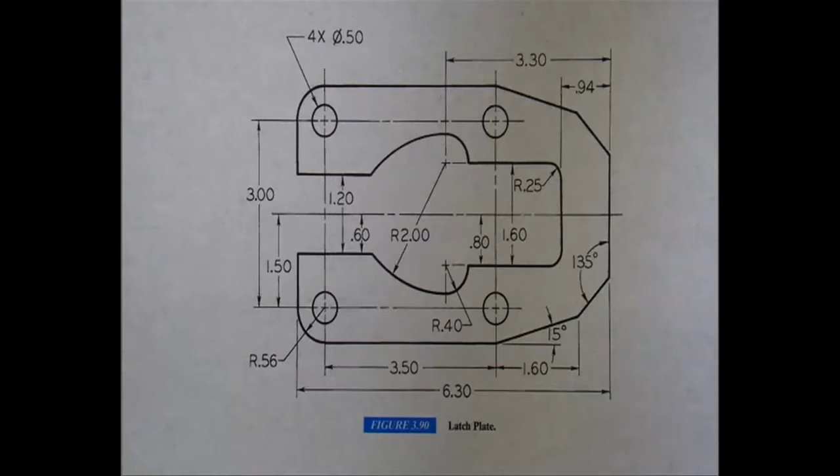This video will demonstrate how to draw or lay out the latch plate. This figure can be found on Blackboard. This is the layout of the latch plate. So what I'm going to do today is help show you how to lay this out and draw the shapes using your different tools and equipment.

Up to this point you've been using your scale. You've also been using some of your other tools, and we're going to use the circle template today, of course along with the lead holder. We'll probably even have to pull out our compass for some of the other arcs. You can look at this from the Blackboard screen, or you can print it out if you need to, whatever the case.

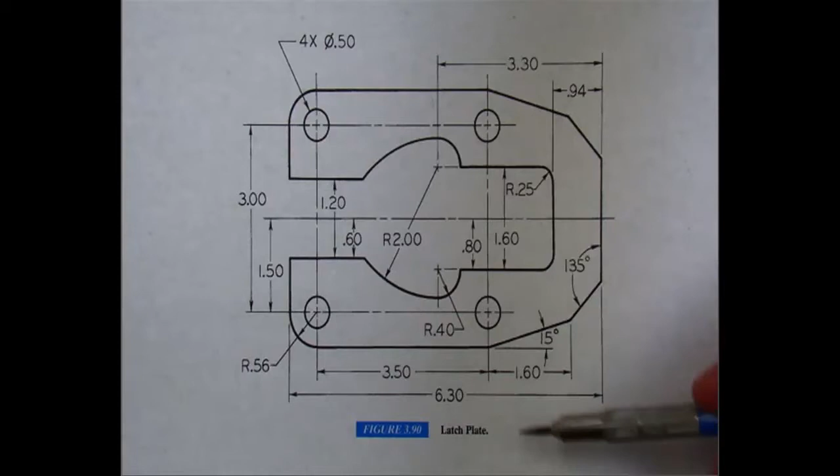So first let's kind of break this down into geometric shapes. You see some circles and arcs. The overall shape is a large rectangle. We've got some angled lines. And so I would encourage you that every drawing that you're going to lay out, you would just look at the different geometric shapes so you can figure out where to start.

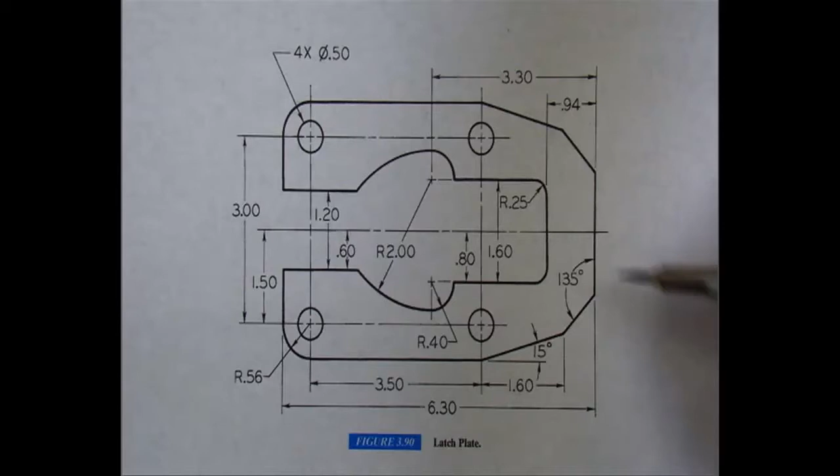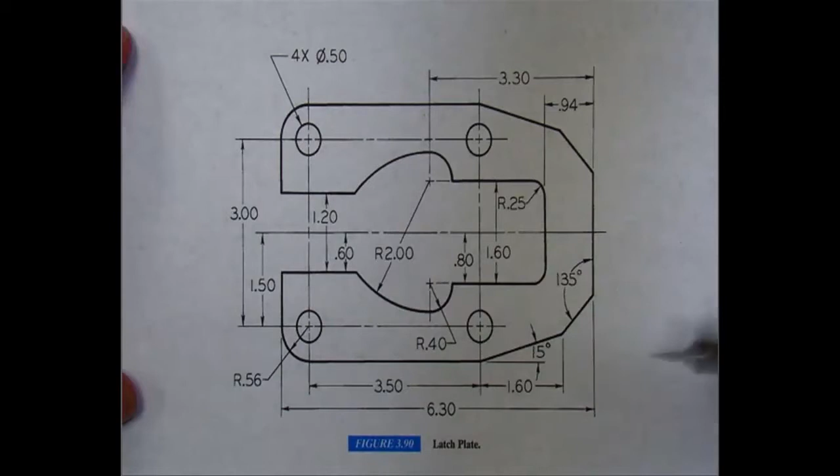Here you have a center line that goes right down the middle, and you've got these other center lines that locate the center points of the arcs and circles. You may notice that the center line right down the middle is dividing this object in half. So this is a symmetrical object about that center line. So that may be a good place to start.

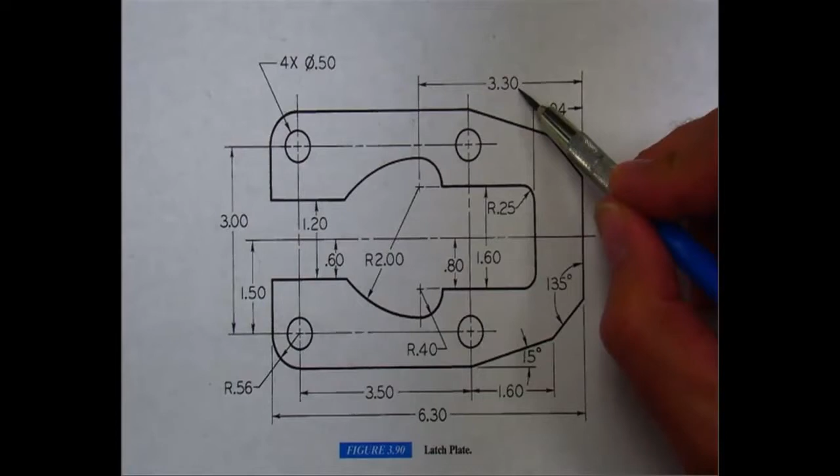Now, one thing you may notice is that the units are in inches, 2 decimal places. Down here you've got this radius of 0.56. So if you'll remember, that means that every point along this arc to the center point has a distance of 0.56. This radius of 0.25 in the corners. And then you have a radius of 0.4.

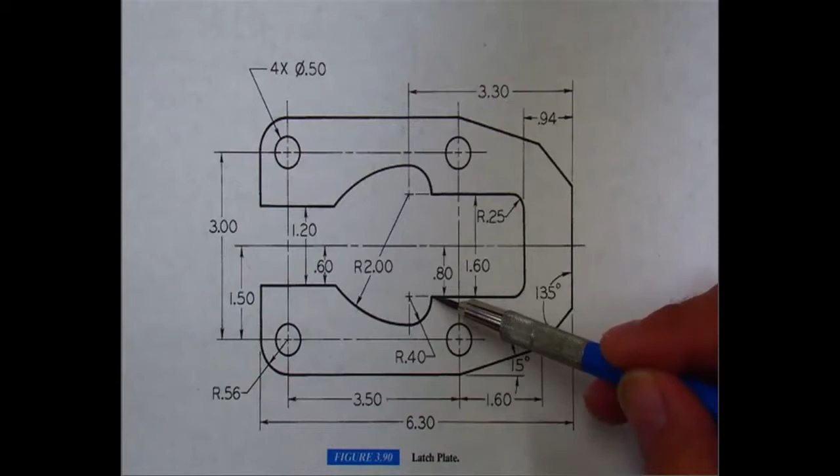This center line right here will help you know where to start the arc. So you'll need to locate that. And then as you come around, the other center line will help you know where to end the arc. So it's very important to locate these center points for your arcs and circles. These also have tangent points with line segments attached.

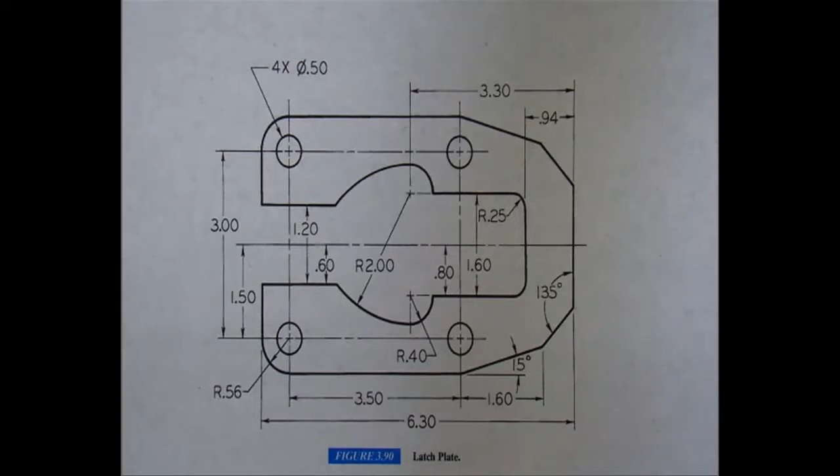And so you may want to lay out the entire rectangle first. It's totally up to you. But to get started, we need to go ahead and tape down a piece of drawing media to our table. Now, in previous videos, you learned how to lay out an A-size border with a title strip.

To save time, I went ahead and pre-printed from the computer a border and title strip so you can see it. But please remember that you don't darken the border and title strip until you completely finish laying out your design. So don't darken it first. Wait till the very end. You don't want to smudge it or anything. So the latch plate will go inside of this area known as the working space.

So let me go ahead and grab some drafting dots and tape it down to the table. If you'll remember that procedure, grab your T-square or your parallel bar and line up either the edge of the paper, or if you already have some pre-printed line segments on the paper, you can line it up with that. You want the drawing on the sheet and the border lines to be lined up with one another.

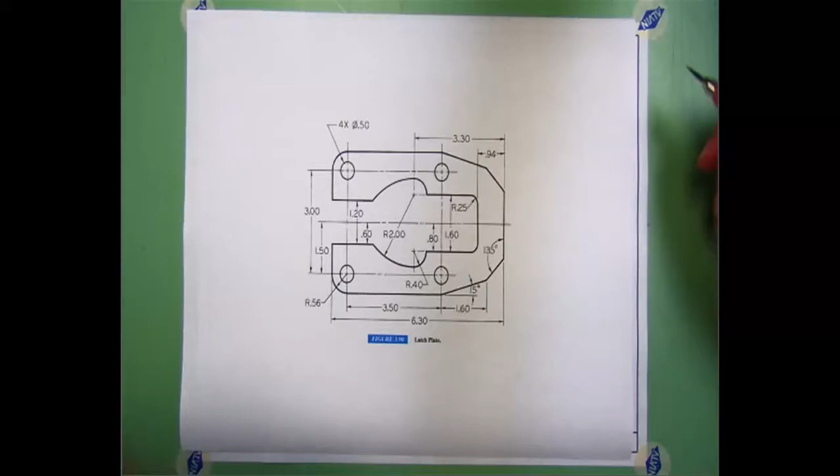Now let's look back at the latch plate and try to figure out where we're going to start laying this out. We've got all of these dimensions on here. They're going to help us size this part and help us in our layout of this latch plate. You could lay out the entire rectangle. The thing we want to make sure of is that it's centered inside of the space on the sheet.

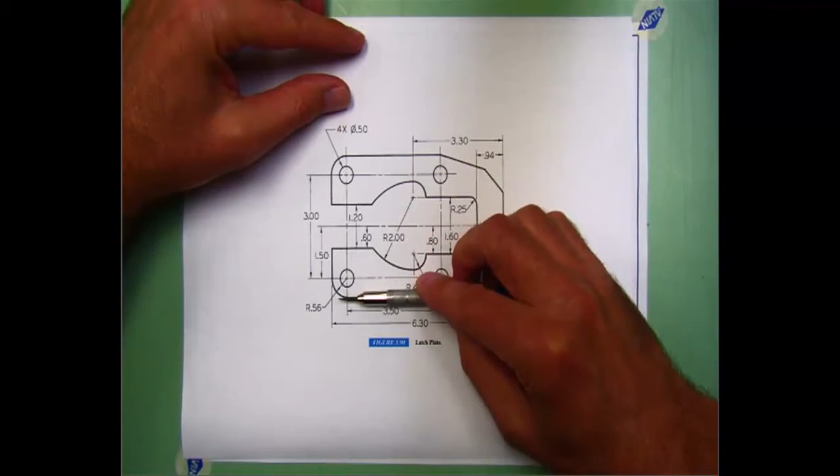You could establish the center line first and then take measurements from there. It's really totally up to you. See, this goes down 0.6 and then 1.5 and then another distance. And so before you get in too much of a hurry, go ahead and break down and analyze where you want to start.

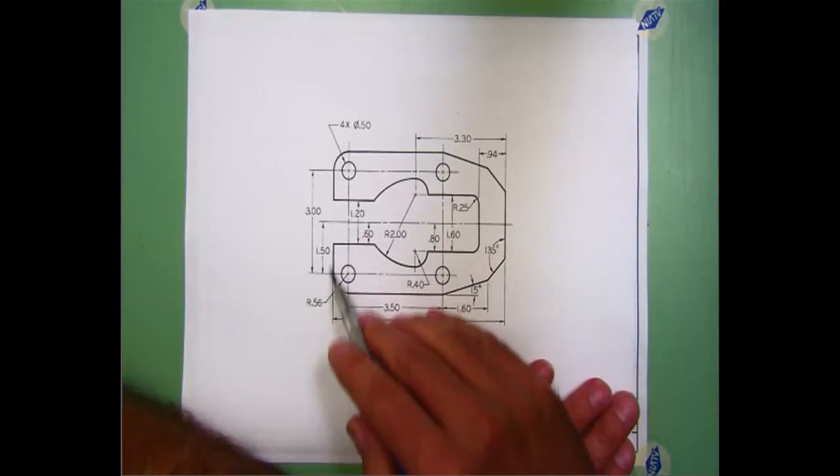You've got horizontal line segments, vertical line segments, and they all relate to one another. You say, well, how long are these line segments? Well, it really doesn't matter. What matters is that you take the dimensions that are given and you draw everything that you need to based on these dimensions, and then everything else will take care of itself and the design will come together.

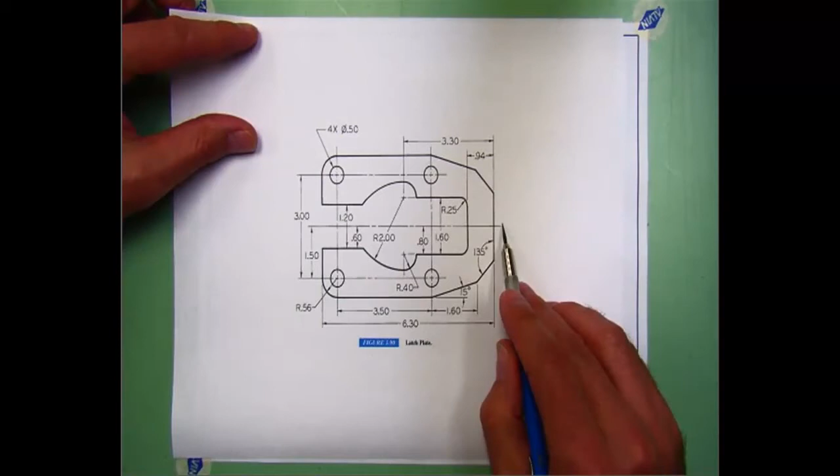So first, let's establish this horizontal center line. Now, as you look back at your layout, this is the working space. From the top of the title strip to the top of the border line, and then in between the two border lines from left to right, this is your working space, and this is where your design goes.

And so when you take this measurement right here, that's where you want to find the midpoint or the center of that space. So I'm going to take my scale and I'm going to measure and see how tall this working space is. Now as I look, it looks like it's about 7 5/8 of an inch. 7 5/8. So what we need to do is take that 7 5/8 and divide that in half.

Now you can take your calculator and plug in 7 5/8 and then divide that by 2 and get your answer. Not a problem. But let me go ahead and show you another way that you can divide numbers in half. You remember, this is called an improper fraction, I think. You all have had math a lot more than I have recently, but here's some techniques that we can use in drafting. So let's start with something a little more simple.

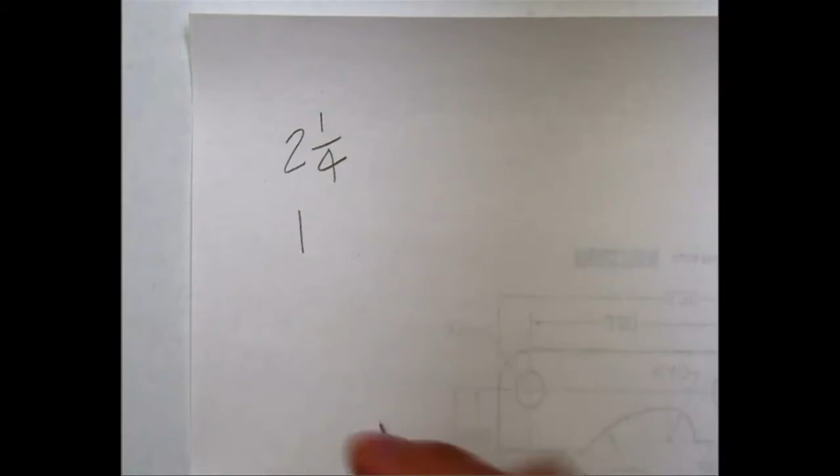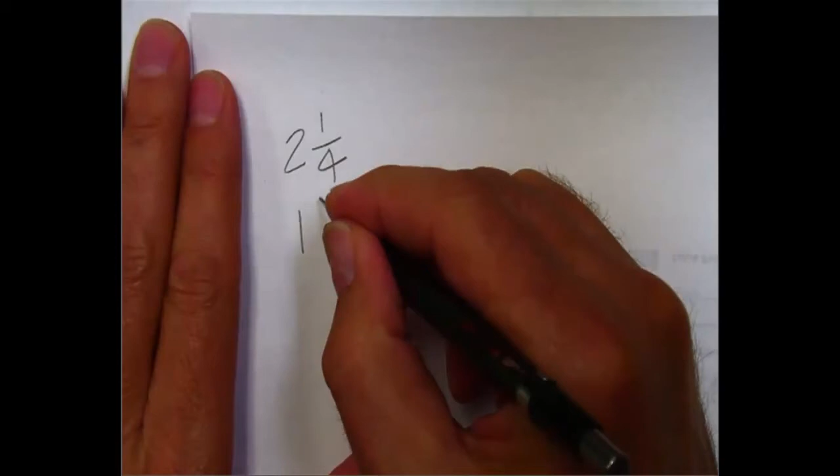Let's start with 2 1/4. 2 1/4, and we need half of this number. So what I like to do is isolate the whole number and then ask a question. What's half of 2? Well, it's easy. The answer is 1. So we'll write down 1. And then I like to isolate the fraction. And we say, what's half of a 4th? And you go, well, that's easy. Half of 1/4 is 1/8. So let's write down 1/8. So half of 2 1/4 is 1 1/8.

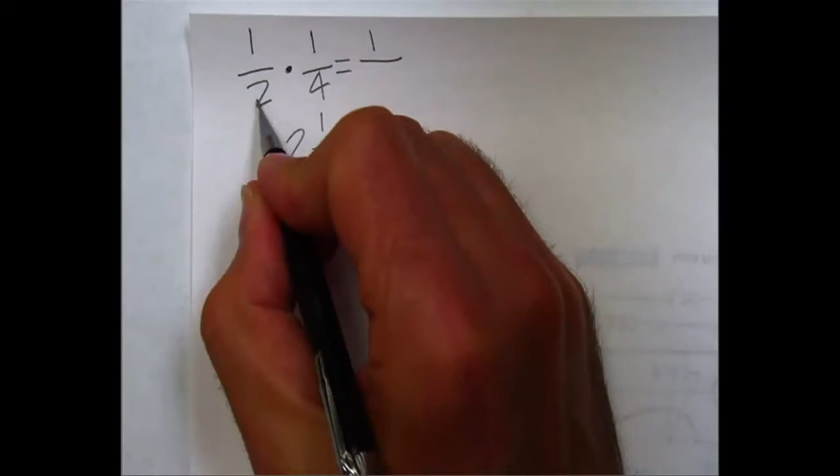But what are we really saying? So let's write this out so we can see it. We're saying what's half of, and remember, of in math means multiplication, so we'll write a dot. What's half of 1/4? If you remember the equation, we'll take 1 times 1 is 1. Then we'll go 2 times 4 is 8. And that's what we're doing when we do that in our head. What's half of 1/4? And we know that equals 1/8. Just to review. Let's do another one.

What's half of 1/8? Well, you do your multiplication. 1 times 1 is 1. 2 times 8 is 16. And so 1/2 of 1/8 equals 1/16. Notice the numerator stays the same, and then the denominator is doubled whenever you're taking 1/2 of a fraction. So 1/2, see the pattern over here, 1/2 of 1/8 is 1/16. And so keep that in mind as you do your math in this class.

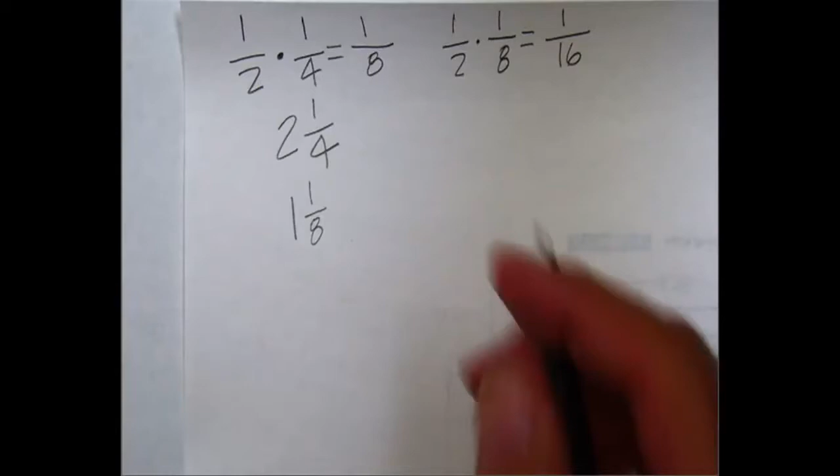Let's do another one that's a little bit different. 3/8 of an inch. So we're going to say what's half of 3/8? And we do our multiplication. So 3 times 1 is 3. 8 times 2 is 16. So 1/2 of 3/8 is 3/16. The numerator stays the same. The denominator is doubled. How about what's half of 3/16? 3 times 1 is 3. 16 times 2 is 32. So 1/2 of 3/16 is 3/32 of an inch. This is a quick way to take half of fractions.

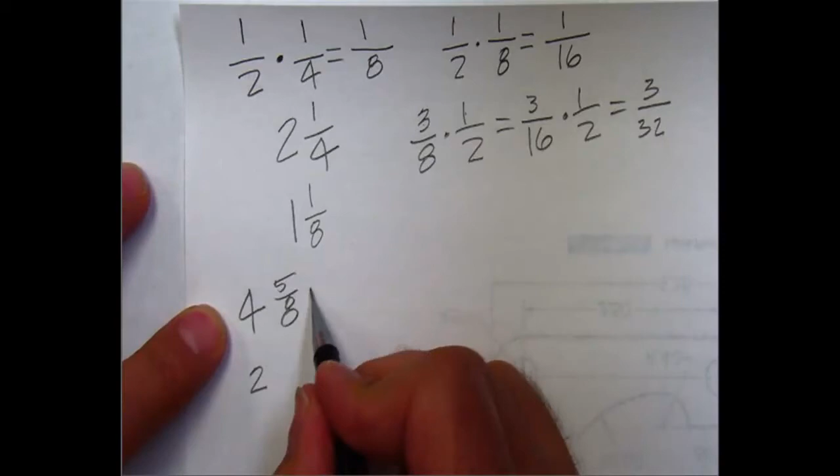And if you have mixed numbers, then this is a really quick way to get half of a measurement that you need. Let's do another one here. What's half of 4 5/8? So we know that 1/2 of 4 is 2. And then half of 5/8, what's that going to be? Remember the pattern. 5 times 1 is 5. 8 times 2 is 16. So half of 4 5/8 is 2 5/16. So just remember that. Take notes on this, and it'll help you a lot.

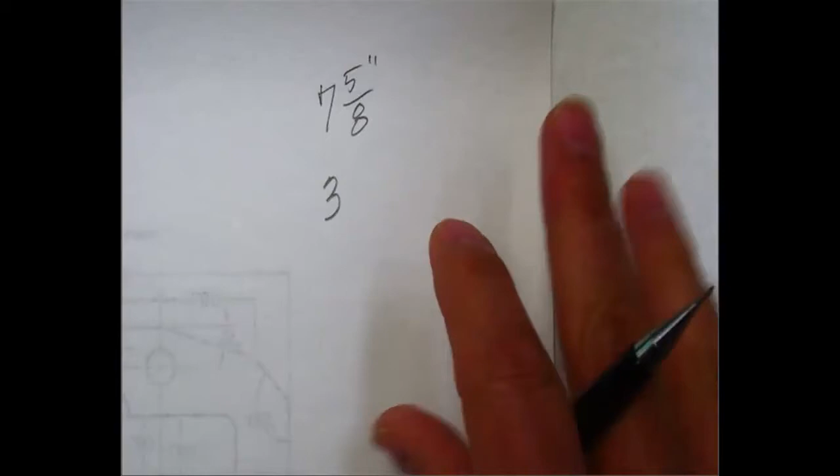So let's go back to this one, 7 5/8. Now when the whole number is odd, and so we've got 7 5/8 here, we do something a little bit different. We still isolate that number, and we know that half of 7 is 3 1/2. So what you do is you write down the whole number, 3, and you just take that half and set it aside. Just leave it alone for a minute. And then you say, well, what's half of 5/8? Now this only works, remember, when the whole number is odd, you can use this method.

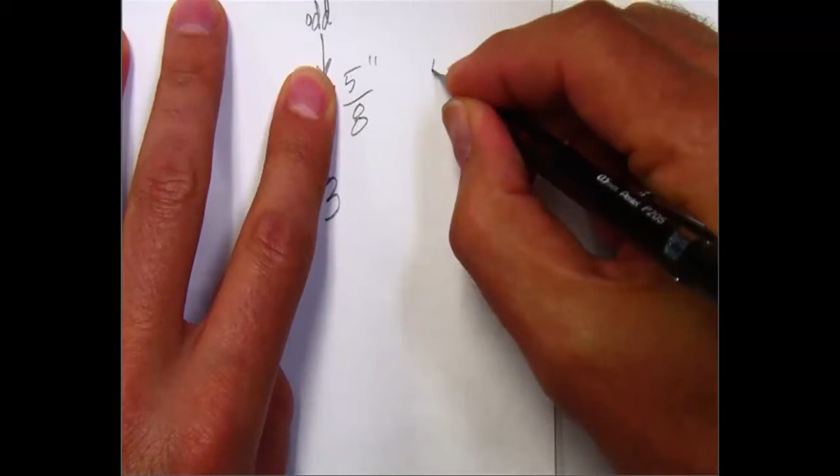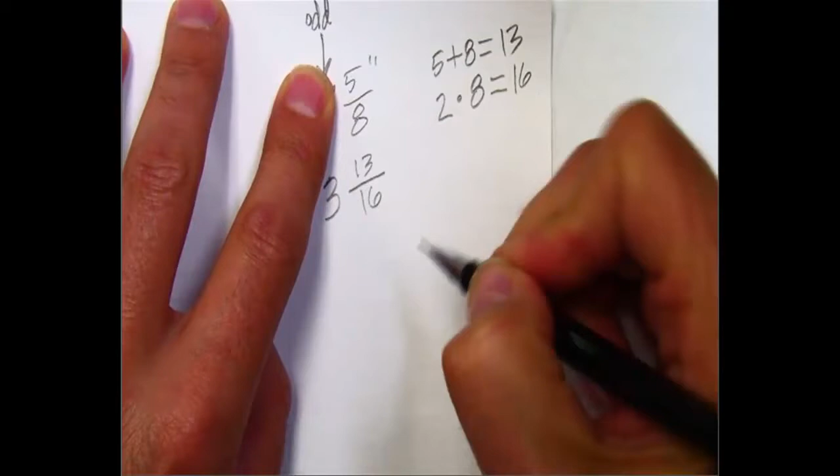Half of 7 is 3 1/2. Now you take the numerator plus the denominator, and you get, correct, 13. So you write down 13. That's your numerator. Then what you do is you double the denominator. And 2 times 8 equals 16. So we write down our 16 for the denominator. So half of 7 5/8 is 3 13/16.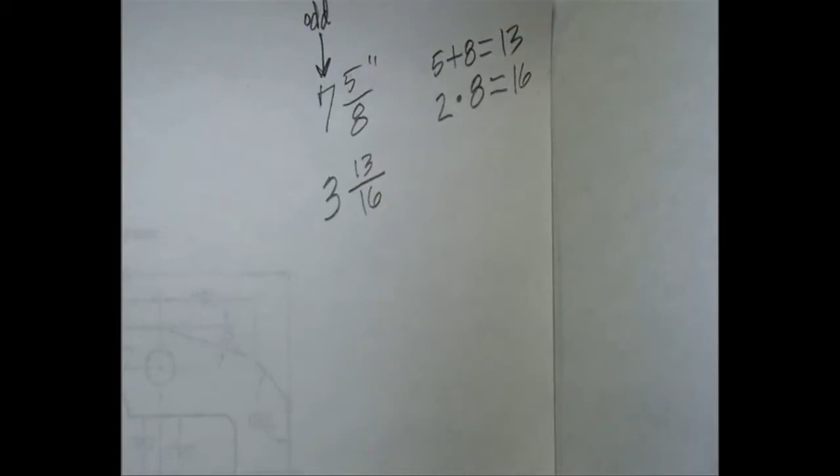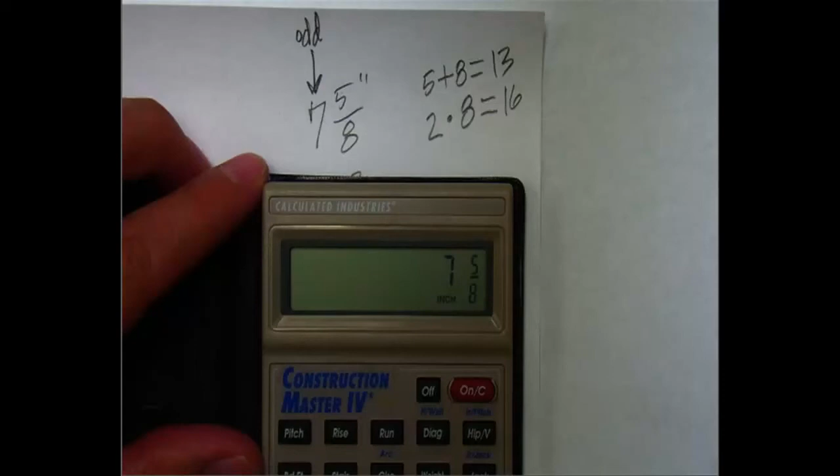So let's double check it. Let me grab a calculator and let's plug in this equation and make sure we did it correctly. 7 5/8 of an inch divided by 2 equals 3 13/16. Just what we got. Now a math teacher showed me this trick a few years ago, and it's really helped out in drafting.

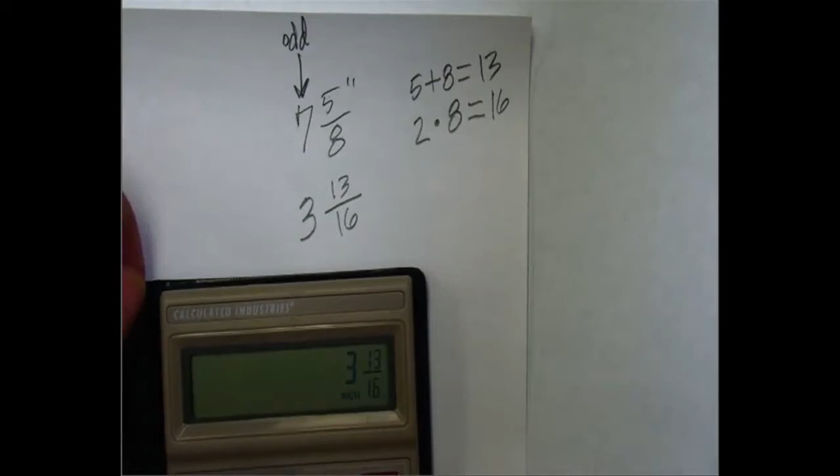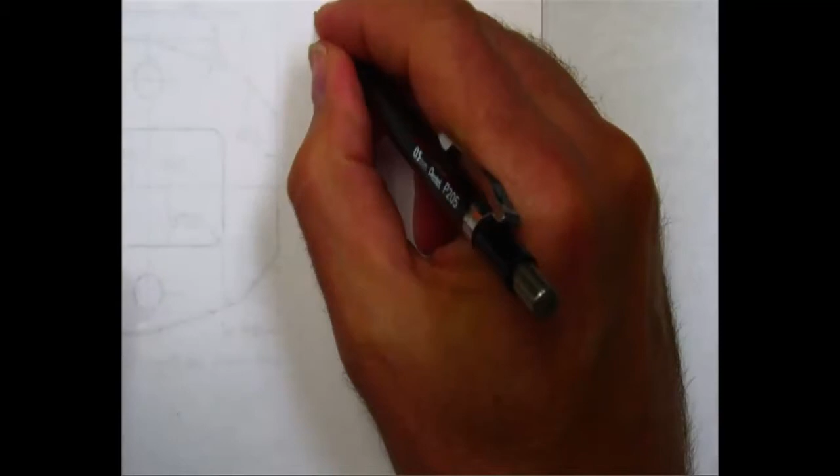And write this down and use it any chance you get, because it'll save you a lot of time. There's no problem using the calculator, but man, if you can do this method, it'll really save you some time. Let's practice another one. Let's do what's half of 3 7/8. Half of 3 7/8.

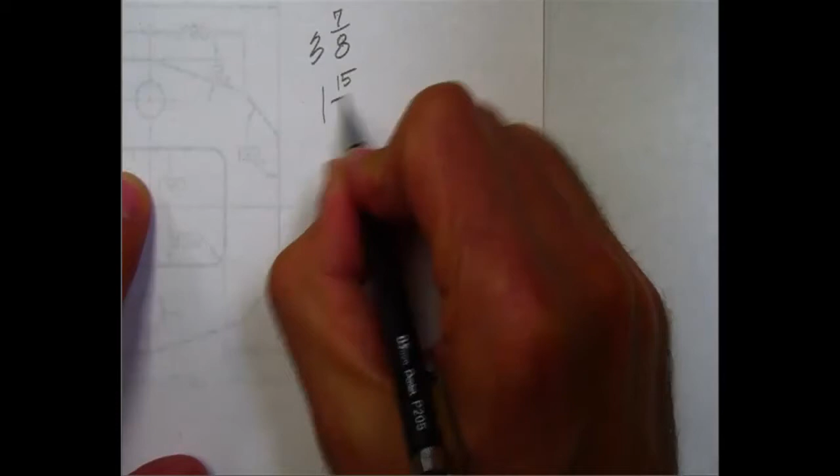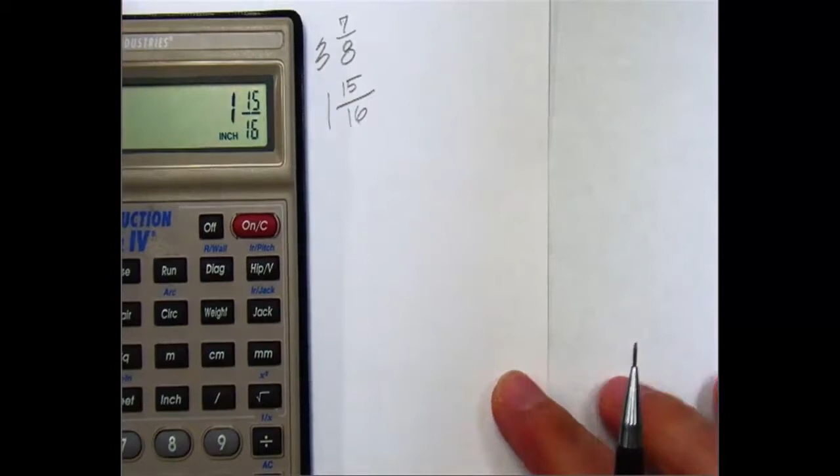So the first thing we do is we isolate the whole number. What's half of 3? 1 1/2. So we write down 1 and set the half part. Then we go 7 plus 8 is 15. Double the denominator and you get 16. So half of 3 7/8 is 1 15/16. Let's double check it on the calculator. Three 7/8 divided by 2 is 1 15/16. Just like we did on paper.

Had one math teacher that called this mental gymnastics, and that was doing these equations in your head. So I hope that gives you some new tools. Remember, this method that we just did only works when the whole number is odd. When it's even, we just do it the other way. Okay?

Now, let's go back to our layout and remember the measurement from the top border line to the top of the title strip of our working space is 7 5/8 of an inch. Half of that was, what was that, 3, remember what it was? 3 13/16. So I'm going to count down and measure 3 13/16, counting by sixteenths.

Remember, you could also take a little bit of a shortcut. Instead of counting all the way up to 13, you could say 4 is 16/16, and so you could say, well, this is 3 16/16, 15, 14, 13, and you can get there a little bit quicker. But you'll develop some skills like that as you go along. So now I've established where half of 7 5/8 is, and now I'm ready to draw a horizontal line that will divide the working space in half.

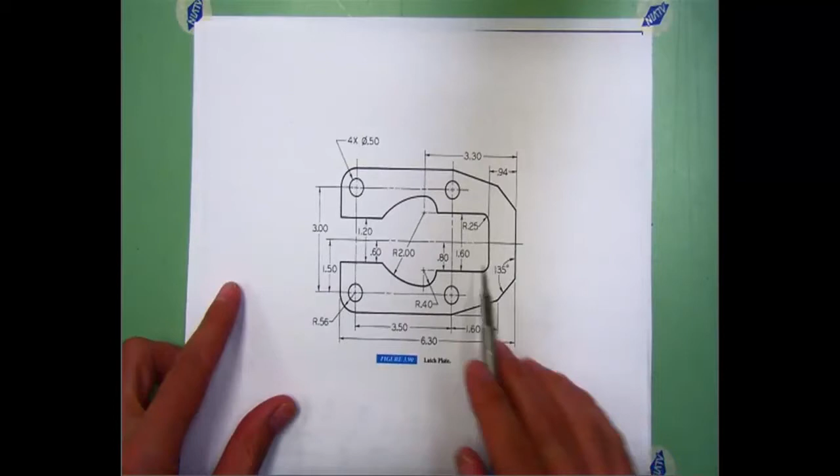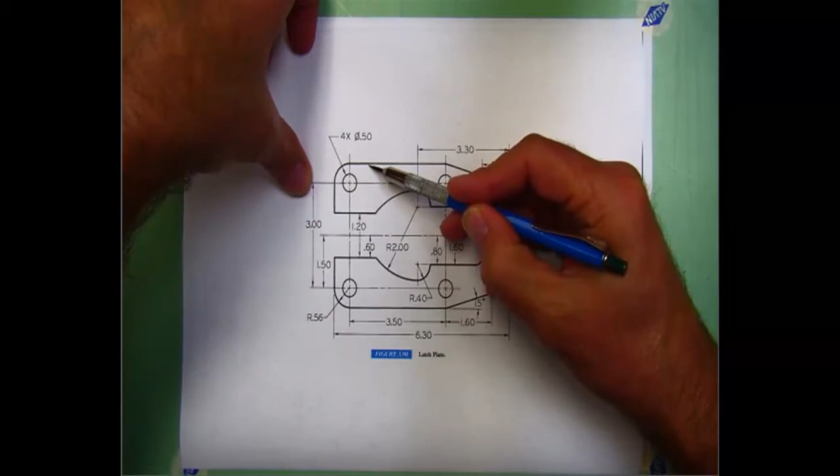So this half, 3 13/16. This other half, 3 13/16. This establishes the horizontal center line of our latch plate as well. Again, you can draw the entire rectangle if you want to, or you can start measuring from this center line based on the dimensions they give you, and you can measure upwards and downwards. However you want to do it is up to you. I'm just trying to help you see some different ways to do it.

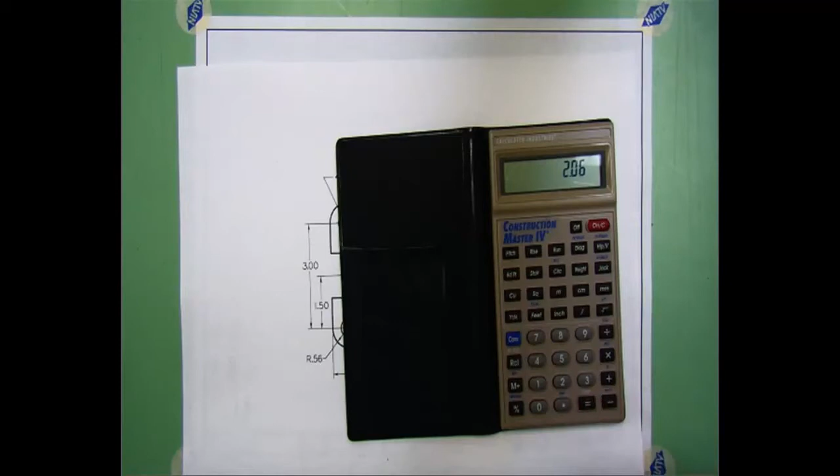And so I know that from the center line down to the other center line is 1 1/2 inches. So we could establish that center line if we wanted to, from the middle center line down to this center line. But then if we wanted to get to the outside edge, we need another dimension, and that dimension is the radius of 0.56. So if we grab our calculator and we take 1.50 plus 0.56, we get the number 2.06. So 2.06 is the dimension from the horizontal center line to the outer edge down here and up here. It's 2.06.

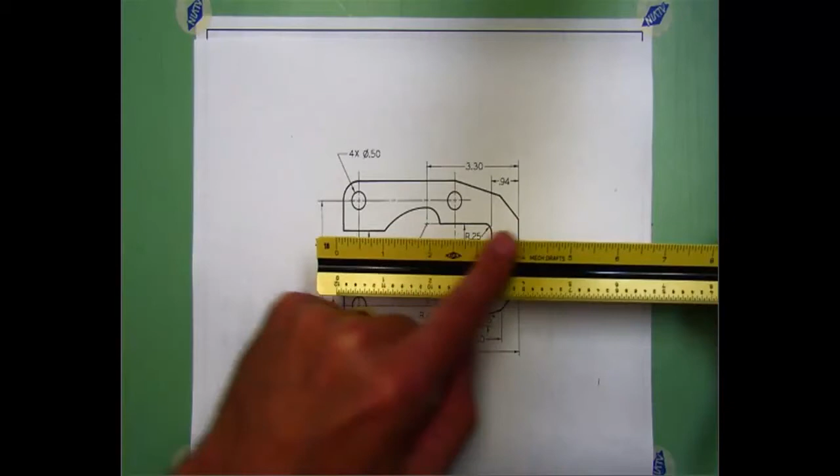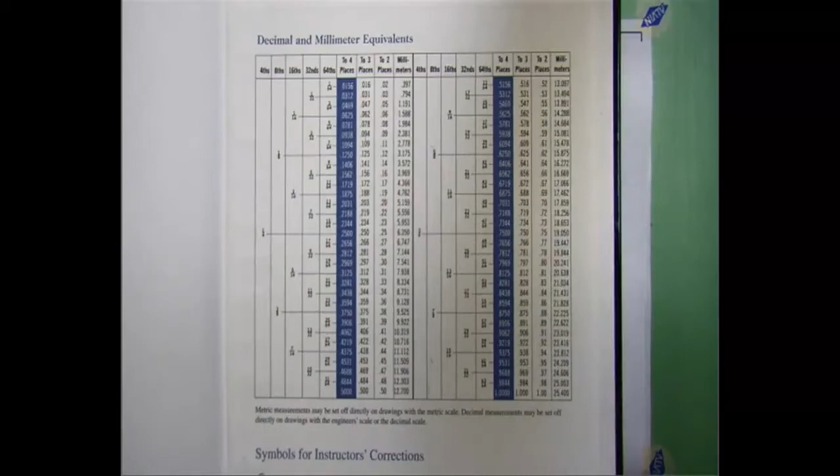So you might say, well, Mr. Turner, how do I measure 2.06 on my scale? Well, let me grab a book here. You can do this a couple of different ways. You could grab a textbook and you could look at this decimal and millimeter equivalence chart. And we have a decimal of an inch of 0.06. So let me zoom in.

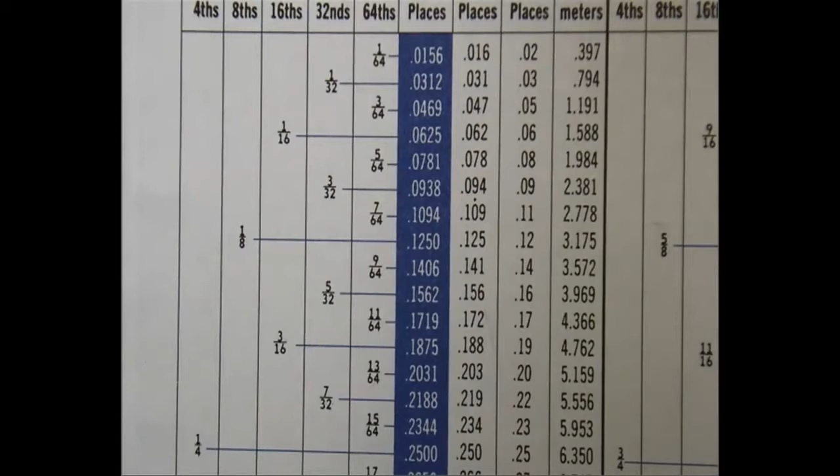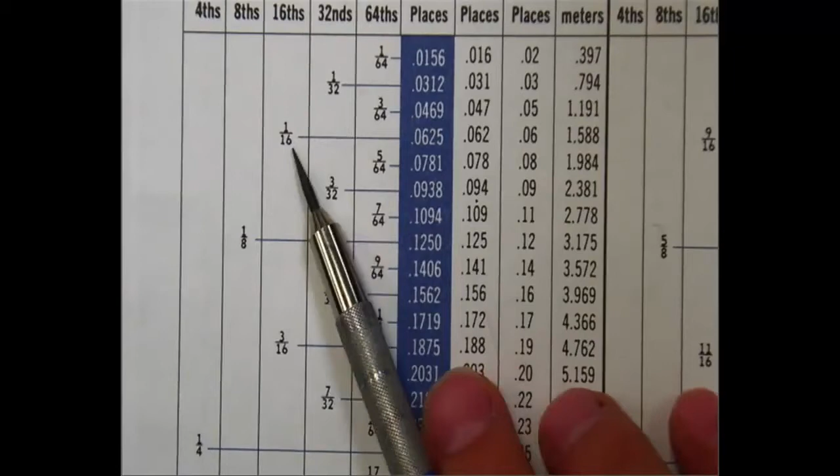Now let's see if we can find 0.06 on this chart and find a fraction that we can measure on our scale. Here's 0.06. If we follow over, it says it's 1/16 of an inch. And that will be fine. That'll be close enough. That's what it rounds to, is 0.06. 1/16 is 0.0625. It's also 0.062, and it's also 0.06. So that would be just fine. We want to be within a pencil lead width accuracy on our manual drawings.

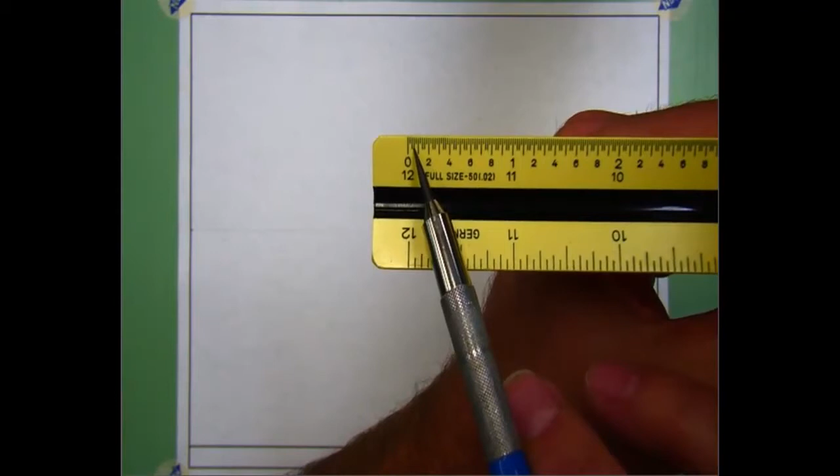Now there's another part of your scale that we had mentioned before. Let's take another look. Remember, 1 inch on this part of the scale is divided into 50 parts. So each line in each division is 0.02 inches. And so we can go 0.02, 0.04, 0.06 on this scale. So the first line, 0.02, 4, and 6. And that's 0.06 inches if you wanted to use this side of the scale. So 1/16 of an inch in fraction, which is 0.06, or you could use that smaller scale.

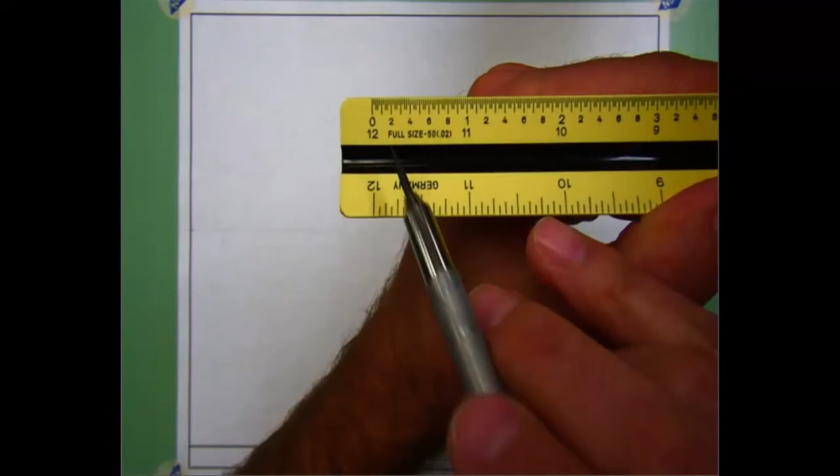Let's look at 0.94 on the scale. How would we measure that? So first we'd take this part of the scale, and we'd go 1, 2, 3, 4, 5, 6, 7, 8, 9. So that's 0.9, 0.92, 0.94 would be right there. So you could use this scale for that, or you could go back to the textbook and you could look for where 0.94 was and use this side of the scale, whatever you want to do. You're the drafter and you're responsible for accuracy, so you do what you will with it, okay?

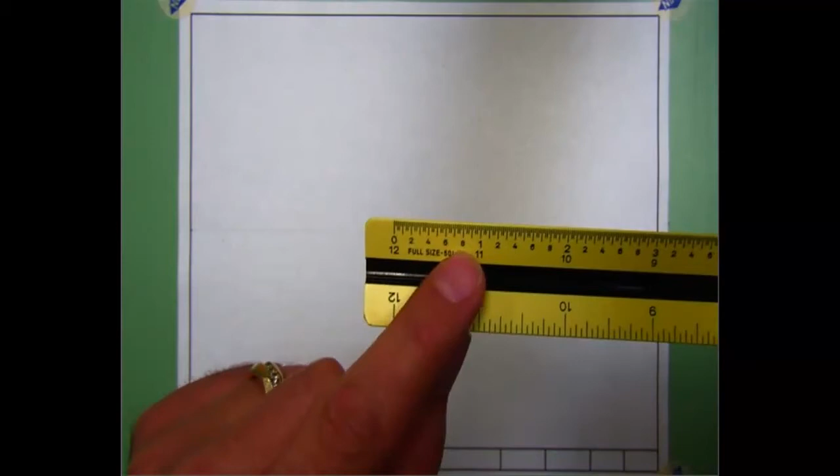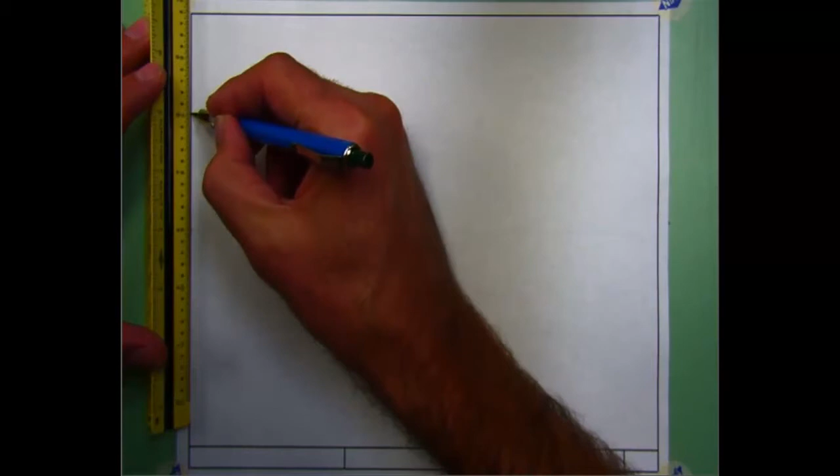So now I'm going to establish a start point on my scale where I want to measure from and line it up with my horizontal center line. And then from this horizontal center line, I'm going to measure my distance 2.06 up, make a little dot. You can make a tick mark or a dot. I prefer a dot, whatever you want to do.

And now from the horizontal center line, I'm going to measure downward 2.06. And that will locate the bottom edge of the latch plate. So let me just double check my dimensions to make sure I did it correctly. 2.06 up, 2.06 down. Now that I've established those points, I'll take my straight edge, my T-square, my parallel bar, and draw very light construction lines all the way across the paper.

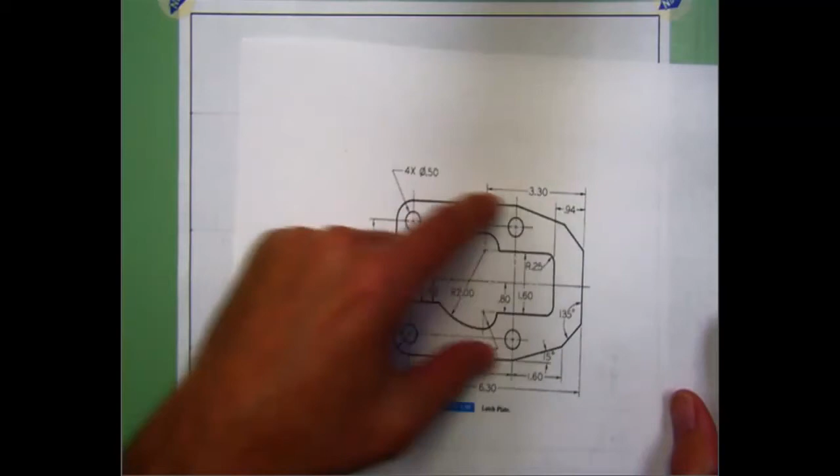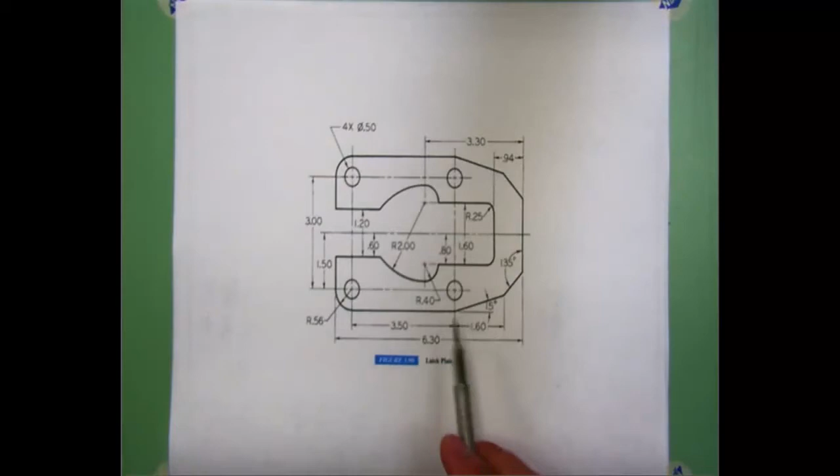So now my latch plate is centered vertically in the working space. Now I need to get these two lines here. I need to get the width of the latch plate. And the total distance is 6.30. But the problem is I don't have a vertical center line located yet. So what I need to do is to find that.

Because I want to get this right in the center of my working space. I know that 6.3 is here, but I'm not quite sure where to start. So I'll have to establish a vertical line somewhere so I can measure and get my distance. There's a couple of ways to do this. First thing I'm going to do is establish a center line. This distance and the width, remember, is 10.5. Half of 10.5 is what?

Notice I'm adjusting my scale and I'm measuring along that horizontal center line so my scale is nice and straight. So half of 10.5 is 5 1/4. I'm going to make a little dot. That'll establish a center line of my working space. And then now what I need to do is to take what's half of 6.30.

You can use your calculator, you can do it in your head, you can do it long division like right here I'm doing. 2 goes into 6 3 times. 6, 0. 2 goes into 3 1 time. 2 times 1 is 2. 1 left over. 2 goes into 10 5 times with none left over. So half of 6.3 is 3.15. Again, you probably could have done that in your head, and that's fine. You can use a calculator, no problem. Just work it out.

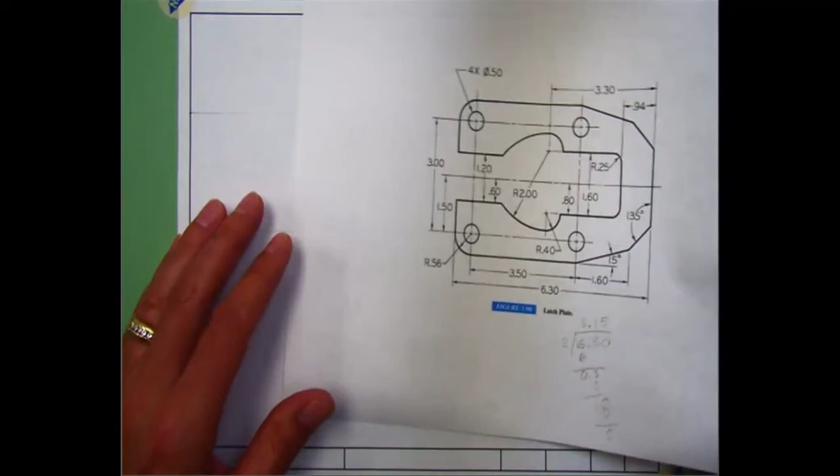So now, again, it goes back to which side of the scale do I want to use? Well, you could look it up on the table or the chart. I'm going to use this side of the scale on mine. And I'm going to line this up on 3.15, right there in the middle. Hold my scale firmly. And now from 3.15, I'm going to go to the left and mark on 0. Then I should be able to go all the way to the right on 6.3 and make a little dot as well.

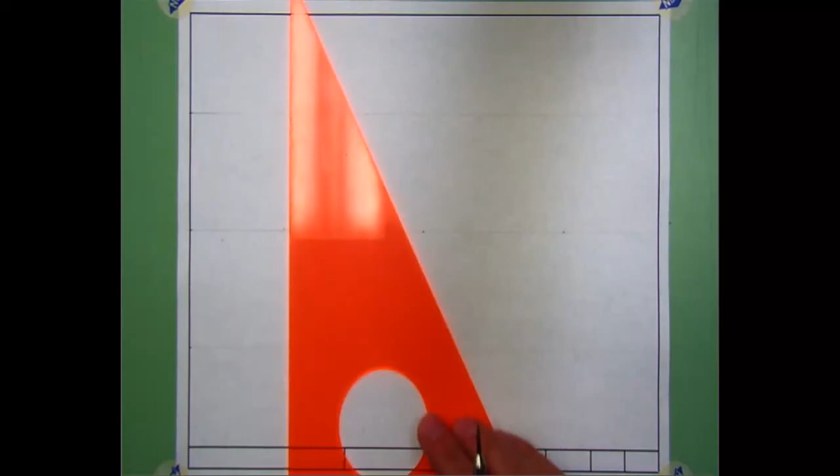And by doing that, now I've centered the 6.3, and this should be the same as this. The most important thing is that you've got the 6.3 dimension accurate. The spacing we can adjust a little bit, but we've got to have our latch plate to be 6.3. So I'm going to draw these vertical center lines. Now I've got my T-square below where you can see, but I am using it to draw and to support my triangle as I draw these line segments. So now I've established the overall outside rectangle of this latch plate, and it's centered inside the working space.

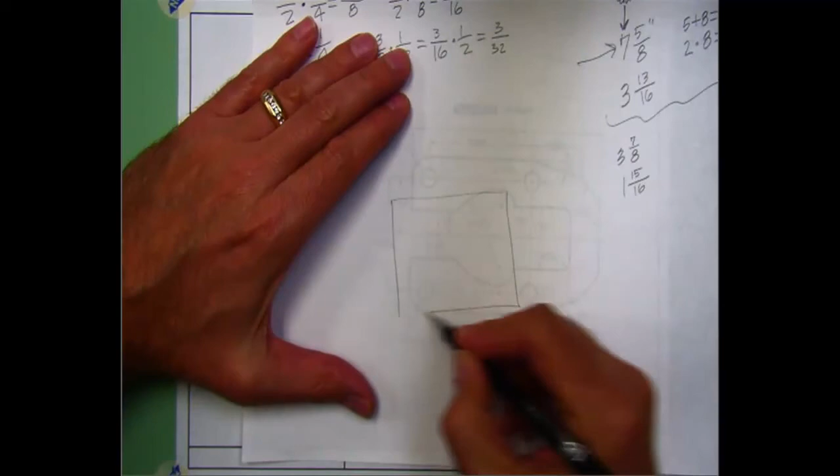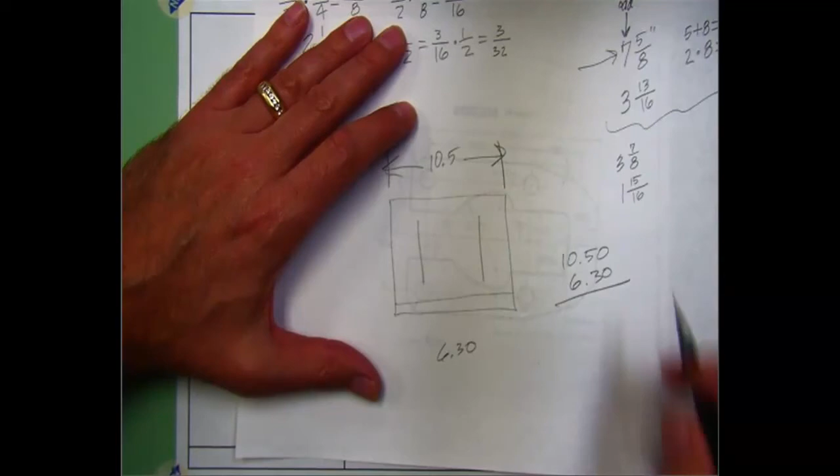Now here's another way you could do it. Here's an example of our border line and our title block. So the border, remember, was 10.5 inches. The distance of these two line segments was 6.3. Now if you take 10.5 minus 6.3, what do you get? You do the math, you got 2, you got 4. You get 4.20. That's the space left over.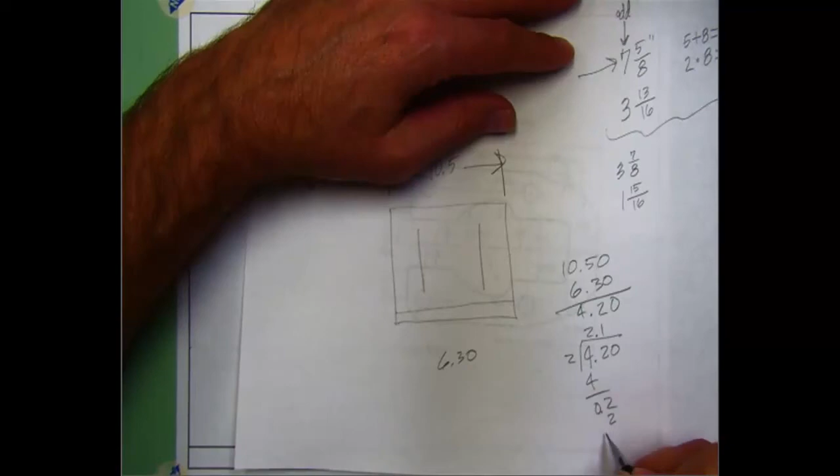Now what you need to do is to take that 4.20 and divide that into 2. Divide it in half. You get 4 there. 1. Again, you can do it in your head or you do it the long way. That's no problem. You got 0. Nothing remaining, so 0. Half of 4.2 is 2.10. 2.10 is the space between the border line and the outer edge of the latch plate on both sides.

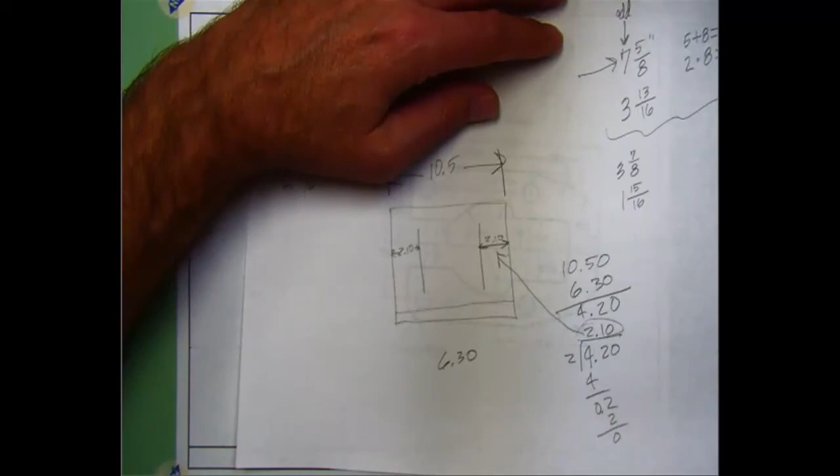Now when you go to lay this out, the more important dimension isn't 2.10, but then that's 6.3 because that's the actual requirement for our part. So you can measure over 2.10 from either the left borderline or the right borderline. That's fine. But just pick one of them and measure the 2.10 and then measure 6.30 because that's a critical dimension. That's what the designer or the engineer gave us. Okay?

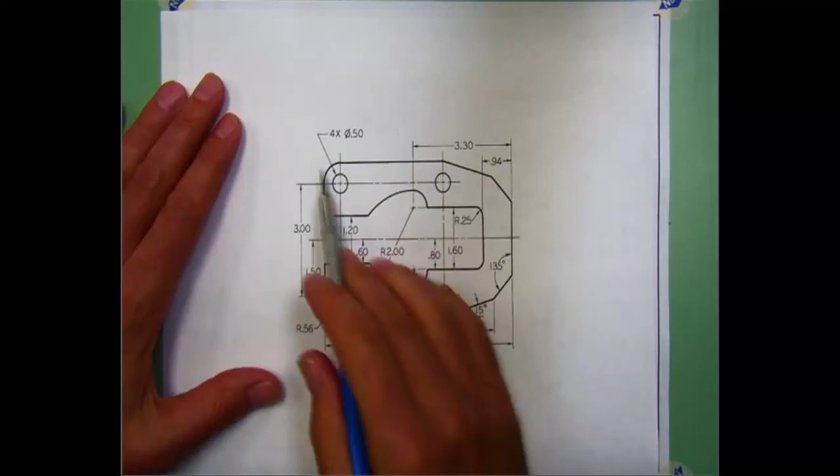So there's our basic layout. Now let's look back at our latch plate and see where we're going to go next. I think we could do this vertical line. We could do these on the bottom. I think I'm going to draw these right here on the bottom next. So you'll notice we've got some holes and we've got a 3.5 inch dimension. And then we've got a 1.6.

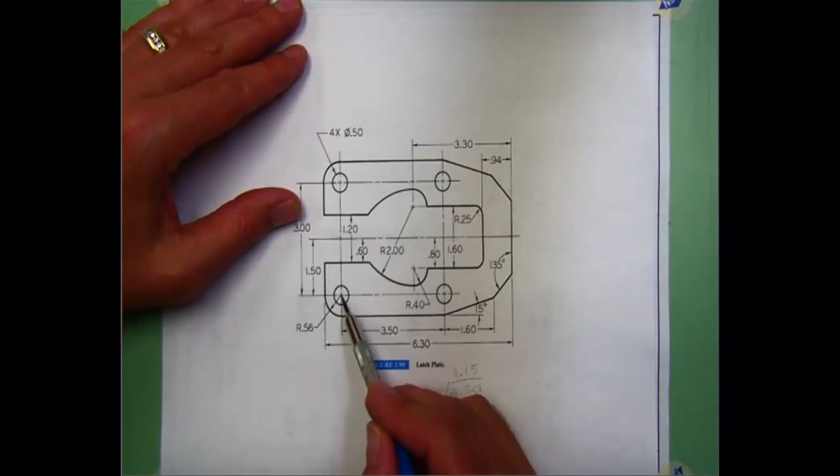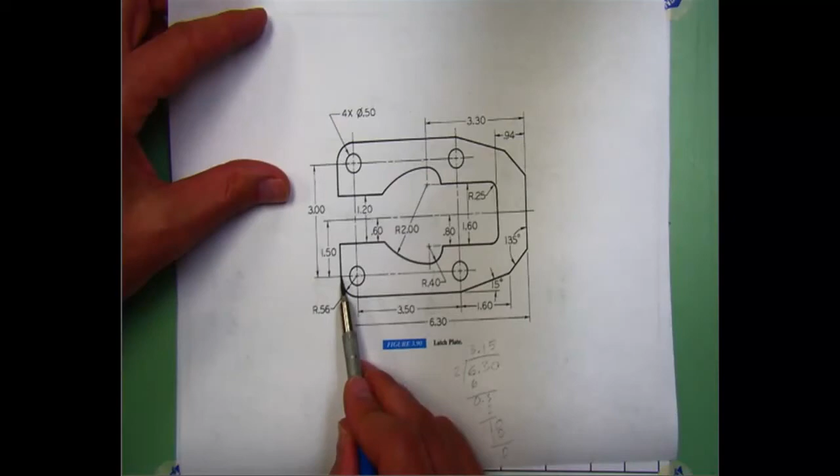Well, we've got to figure out how; we only have this outer edge on this left edge. So they didn't really give us a dimension from the outer edge to the 3.5, so we need to find that. Well, here it is, right here. Oh, it's that radius of 0.56. Remember, every point on that radius to the center is 0.56. So I'm going to take my scale and measure in from the left edge inward 0.56 inches and make a little dot or a little tick mark, whatever you like.

Then I'm going to take my T-square and my triangle and draw a vertical center line. Remember, really light, so you can barely see it. Doesn't have to be dark right now. We'll darken later. Now from this point, I'm going to measure over 3.5 inches to find the location not only of the point where I'm going to draw the line, but it's also going to be my vertical center line. See, right here is that point.

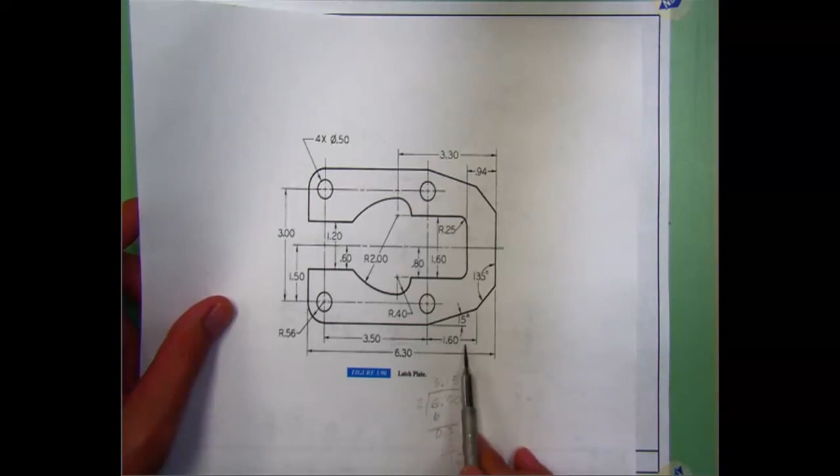So next I need to establish this line segment. Now it's 1.6 in the horizontal. It doesn't mean that the length of that line segment is 1.6. That's not correct. That is not the length. But the horizontal distance from this point and then up, that's 1.6, and that's how you need to locate it.

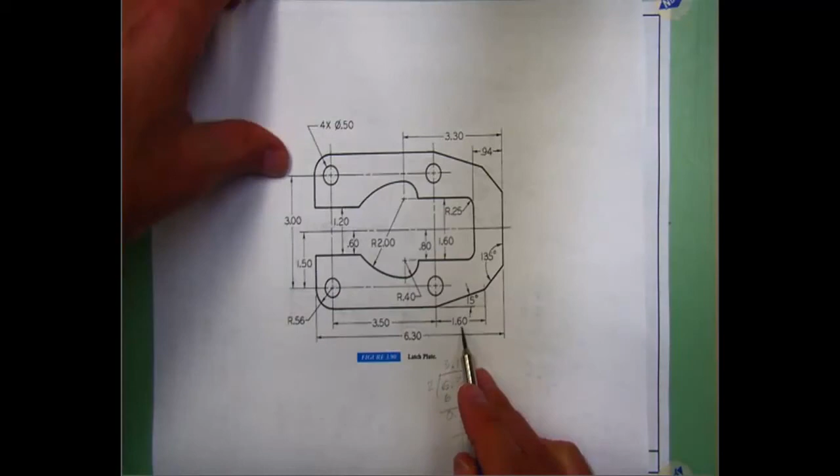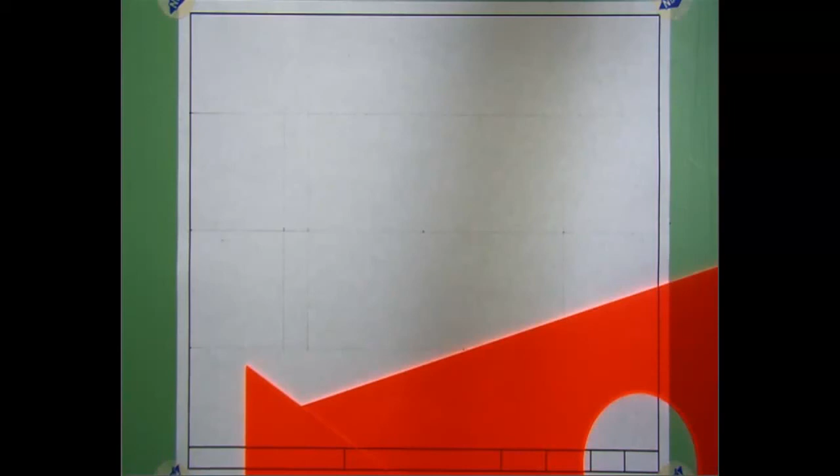Remember in a previous exercise you learned how to create line segments at different angles using your triangles and your T-square or parallel bar? Well, now we need to establish a 15-degree angle. And so I'm going to, again, adjust my triangles and get them established. Use that triangle wheel if you need to. My T-square is down below, and now I'm going to go ahead and draw a 15-degree angled line segment. And I'm just going to draw it over here. I don't know where to stop yet, so I'm just going to draw it lightly in that direction.

Now I need to establish the end point, so I'm going to measure in a horizontal direction along the established line, measure over 1.6 inches, make a mark, and then I'm going to project that mark upwards until it intersects with the line that's drawn at a 15-degree angle, and there it is. So that's the length of that line segment. So I'm going to make a little dot just to know where I am. Right there. Good. Next, we need to draw this line segment. Now, this is the point we found, so now we need to draw this little line segment that goes up.

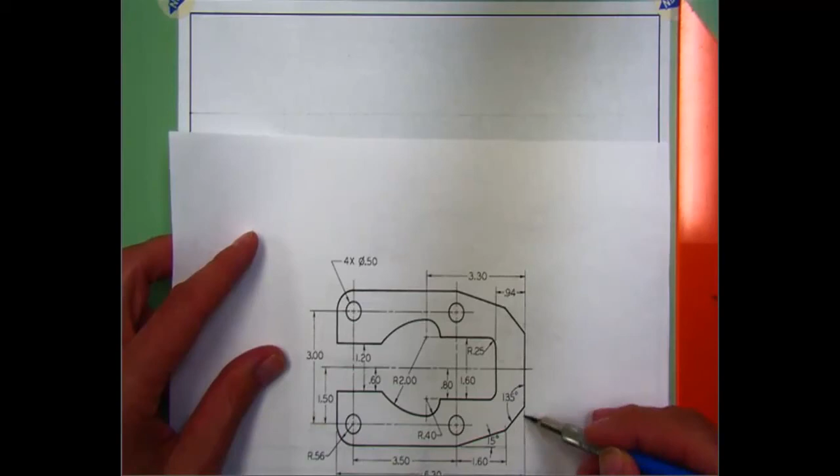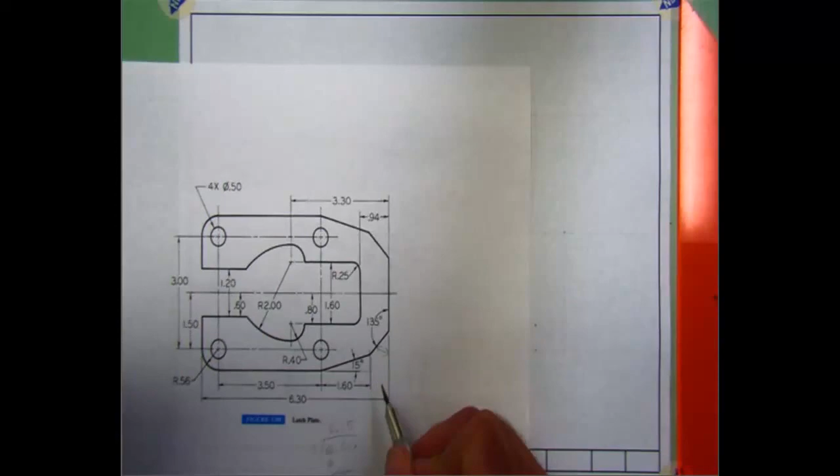They don't give me a distance, but they do give me an angle. Okay, there's the right edge. So they give me an angle of 135 degrees. Okay, 135 degrees. Now we need to know this angle right here. So you need to do a simple math problem.

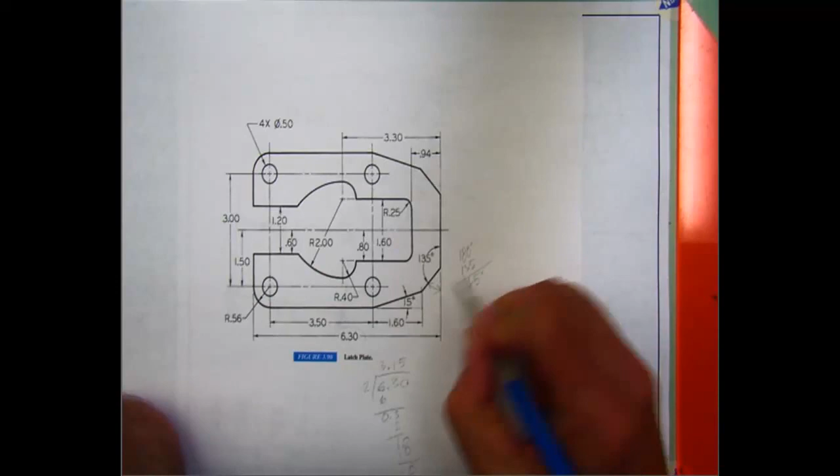So remember what the angle of a line segment is, a straight angle? Right, it's 180 degrees. So I'm going to take 180 degrees, what I know, minus 135 degrees, and that's going to give me 45 degrees. So this short angle is 45 degrees. So take your 45-45-90 triangle, your T-square or your parallel bar, lay it on the sheet.

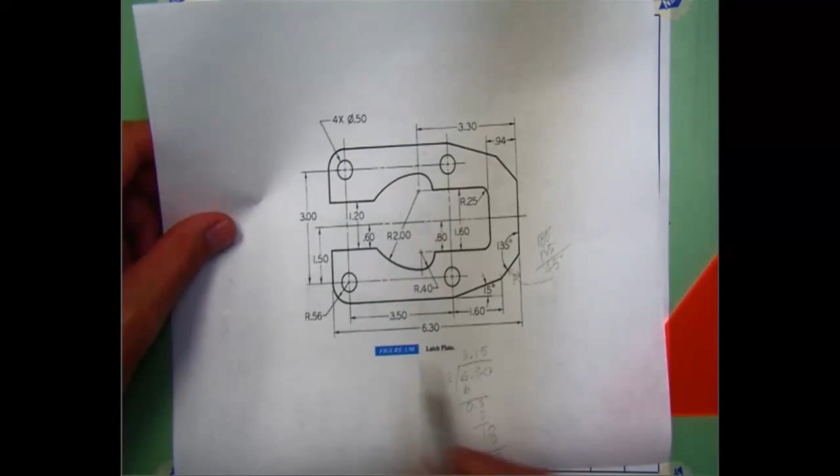Here, let me show you my T-square. I'm resting my triangle right on the T-square. And now I'm going to draw my 45-degree line segment, very light. And I just drew it enough to intersect that vertical line segment. And that's how you locate that point. So I've drawn this horizontal line and my two angled lines using my tools and techniques.

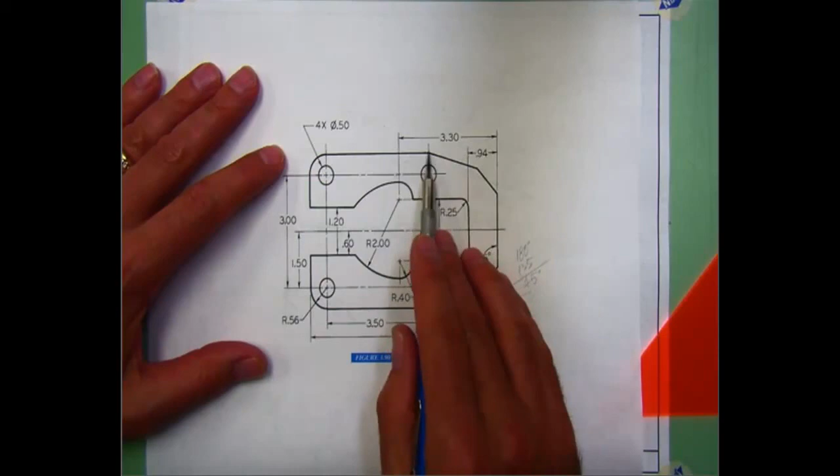Now remember, you can go up here and draw this top part, and you're going to use the same technique because it's symmetrical. So why don't you go ahead on your own and draw that upper part right there, and I'll do mine as well. So this is going to end part 1 of the latch plate, how to begin laying out this part on an A-size sheet. So you go ahead and draw the top part, and I'll see you in the next video.